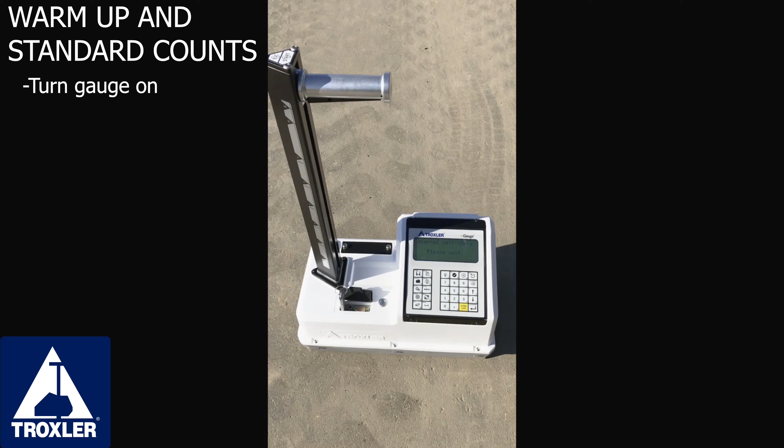The timer is set to 300 seconds. You do have the option to escape the warm-up, but it is not recommended. Troxler does recommend letting the gauge warm up for a total of 10 minutes. Once the warm-up is complete, you will be at the Ready menu.

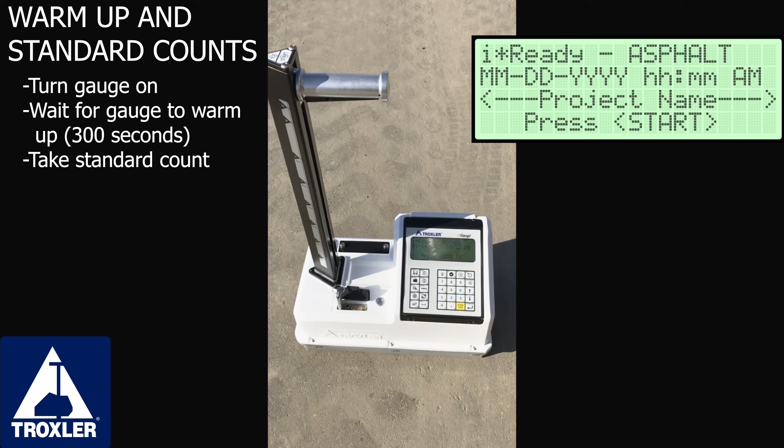It is always recommended to take a standard count at the beginning of each day that the gauge is used. This is done by pressing the standard button on the keypad. The previous standard count is shown along with the question, "Take new count?" Press yes, and the gauge will walk you through the standard count process.

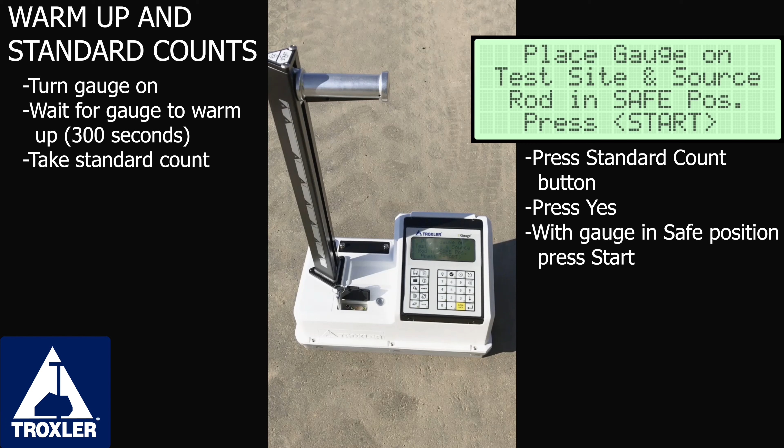Follow the on-screen prompts. The gauge needs to be placed on a solid and relatively dense material such as asphalt or compacted soil. This serves as the standard block. The standard count process is 2 steps, one with the rod in the safe position and one at the background position. Each step will be 2 minutes in length.

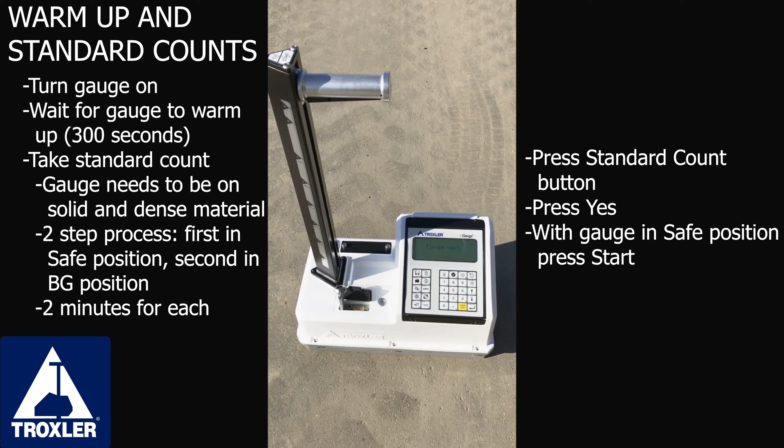After the first step is complete, the gauge will prompt you to move the rod into the background position and press start. It will then finish taking the second step of the standard count.

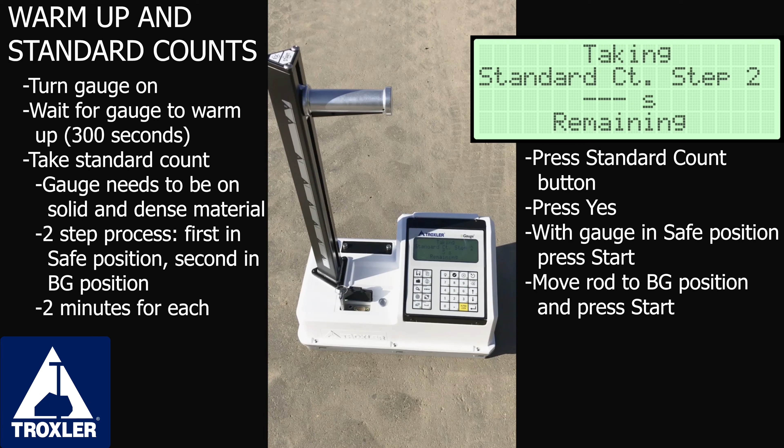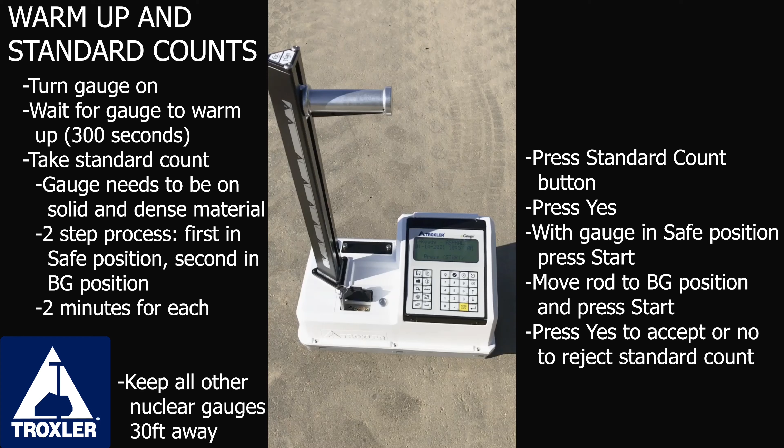Once that is complete, you will be shown the standard count values and asked if you want to use the new standard. A P or F will be displayed in the upper right corner of the screen to denote passing or failing. Press yes to accept a passing standard count or no to reject a failed one. If the standard count fails, it is recommended to take another one. Remember to keep all other nuclear gauges more than 30 feet away.

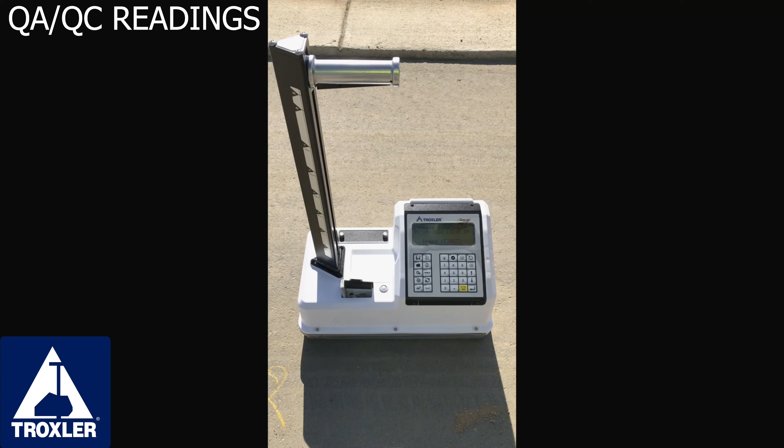To get the precision and accuracy needed for QA/QC readings, we recommend using the following procedure. Set the count time to 1 minute or longer and the background count time to at least 1 minute. Press the setup button and then 1 for count time or 2 for background count time. A confirmation screen will display your selection. Press escape to exit the setup menu and bring you back to the Ready screen.

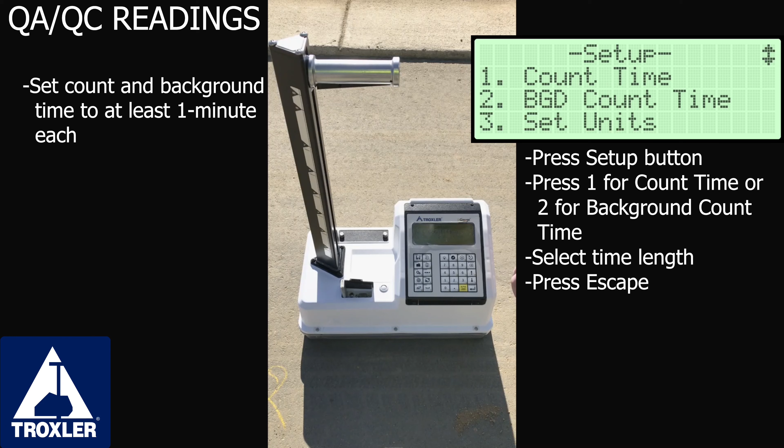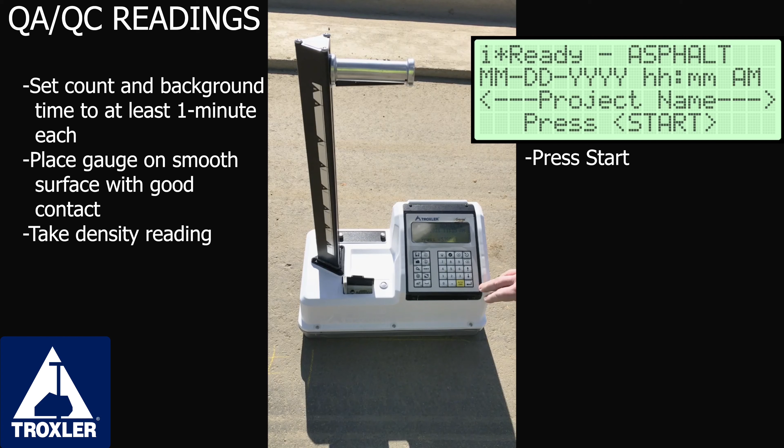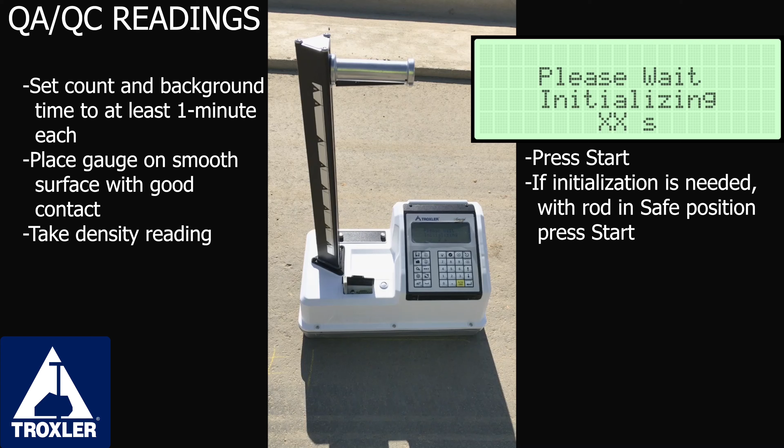At the test location, which should be a smooth surface where the gauge base makes good contact with the asphalt, press start to begin a reading. If an initialization is needed, the gauge will prompt you to put the rod in the safe position and to press start again to initialize. After the initialization, the gauge will prompt you to move the rod to the desired measurement depth. For asphalt measurements, lower the rod to the backscatter position.

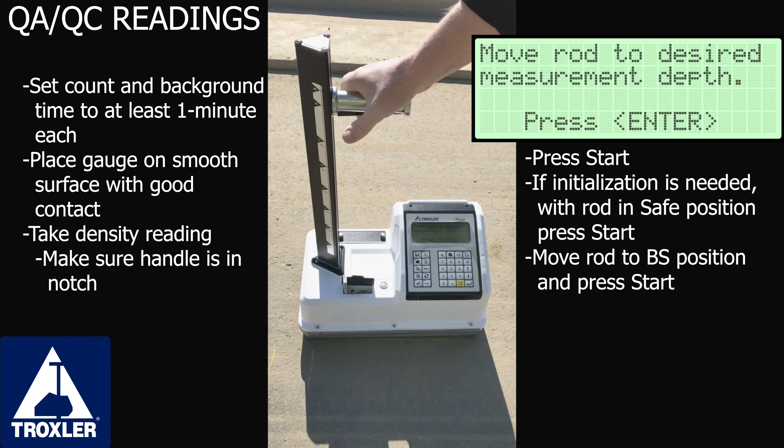When moving the rod, take extra care to ensure that the rod is at the backscatter notch. It can be easy to overshoot this notch. This will result in an inaccurate reading. To ensure the handle is in the notch, you can gently pull up on the handle, then push it back down to seat the handle at the bottom of the notch.

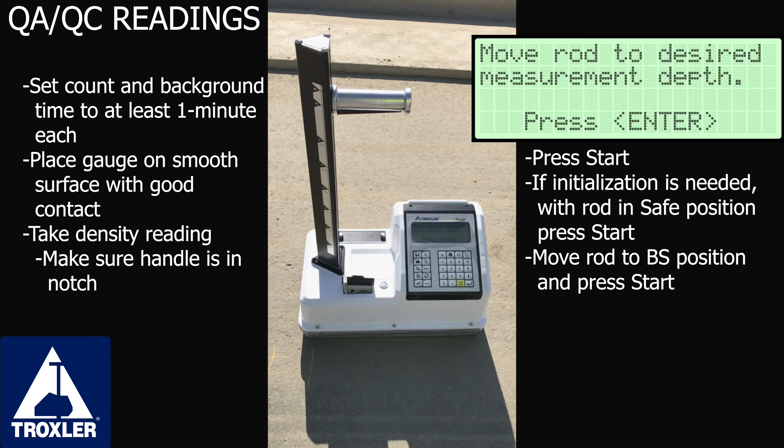Troxler's recommended method is to place the handle just above your target notch and then to press down without gripping the trigger until it stops. This will guarantee you do not overshoot the notch and that it seats in the proper position. Once the rod is in the backscatter notch, press start to begin taking the reading. All other nuclear density gauges should be in their safe position and kept over 30 feet away.

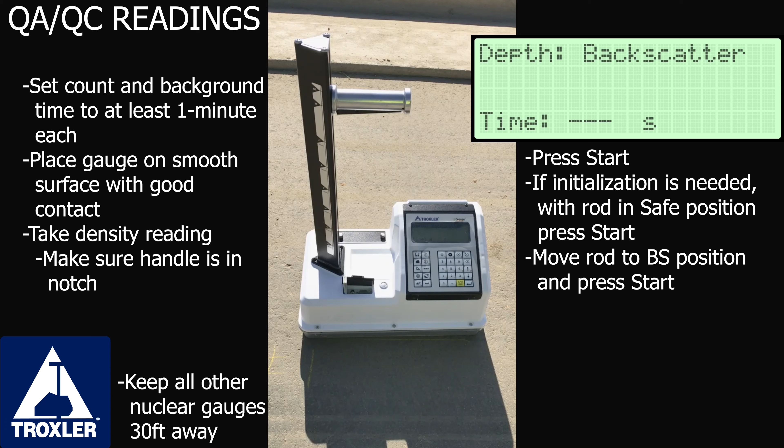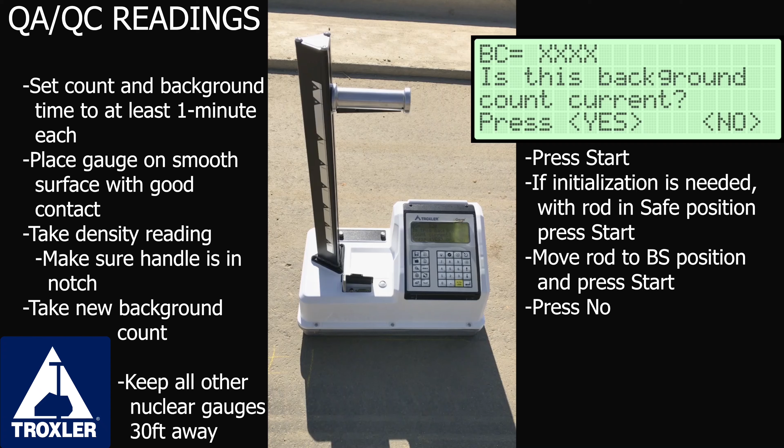After the reading has been taken, the gauge will ask you if the background count is current. Press no to initiate taking a new background count. Follow the on-screen prompts and move the rod into the background position. Press start to begin taking a background reading.

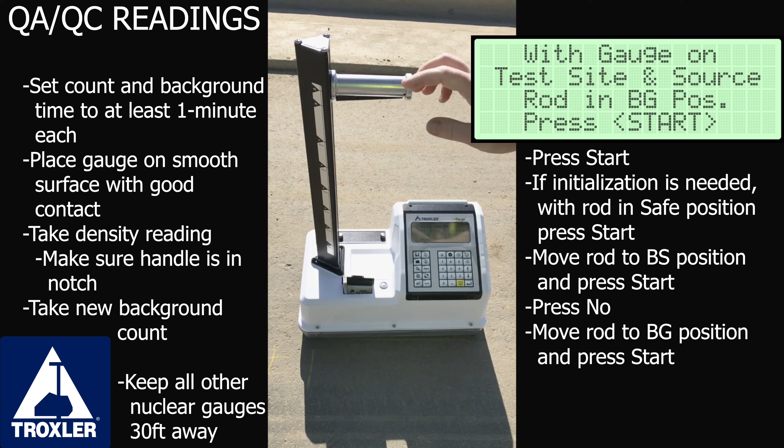At the end of the timer, the gauge will display the background count. Press Enter to proceed to the density results. Depending on what targets were enabled, the density results screen may vary. The top line displays percent compaction, the second line displays wet density, and the bottom line displays percent air voids if a voidless density target is entered. Additional screens with counts and GPS coordinates can be viewed by pressing the down arrow.

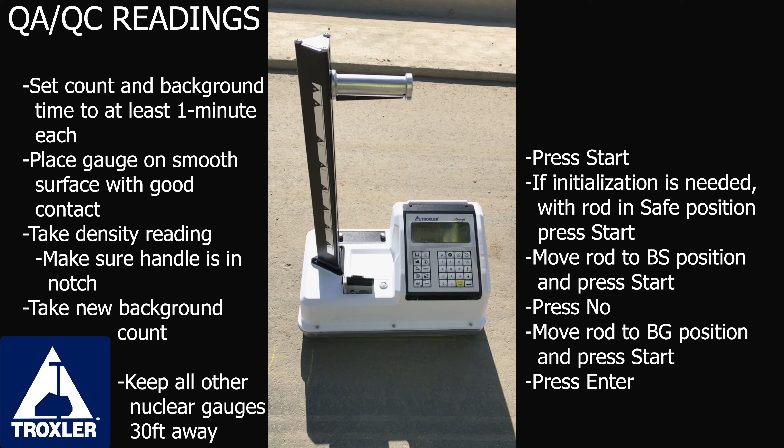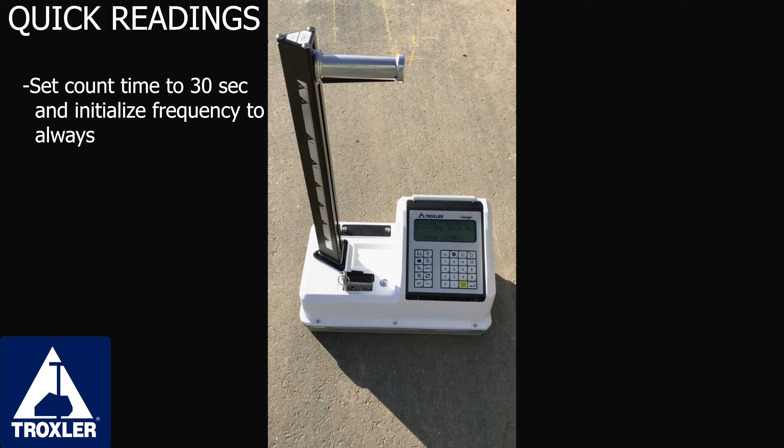Quick readings may be necessary when measuring hot asphalt and working between roller passes. To do this, the gauge can be set to take 30-second readings. When taking readings on hot asphalt, it is recommended to have the gauge initialized before every reading, as the hot asphalt mat can cause temperature fluctuations in the detector. Initializing the gauge before each reading ensures optimal performance for each reading.

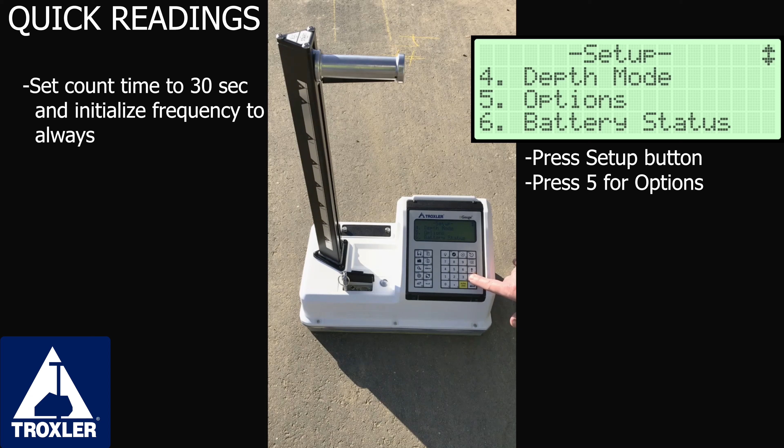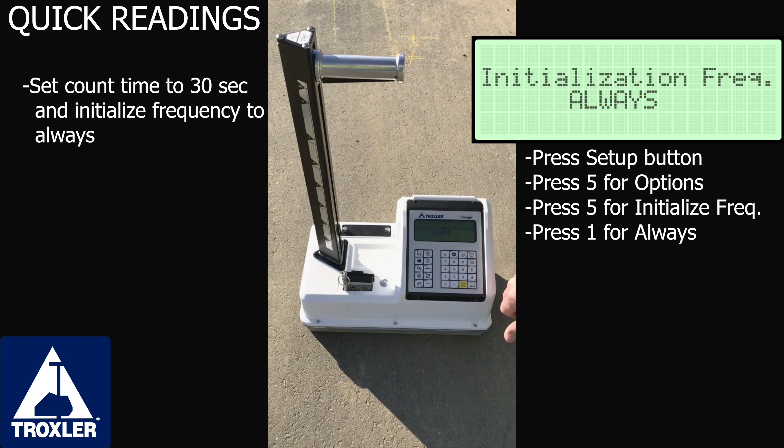To set the initialize frequency to always, press Setup, press 5 for options, then press 5 for initialize frequency. Choose 1 for always. Your selection will then be confirmed. Now let's set the count time to 30 seconds. From the Options menu, press Escape to get to the Setup menu, press 1 for count time, then press 5 for 30-second readings. Your selection will be confirmed. Press Escape to get back to the Ready screen.

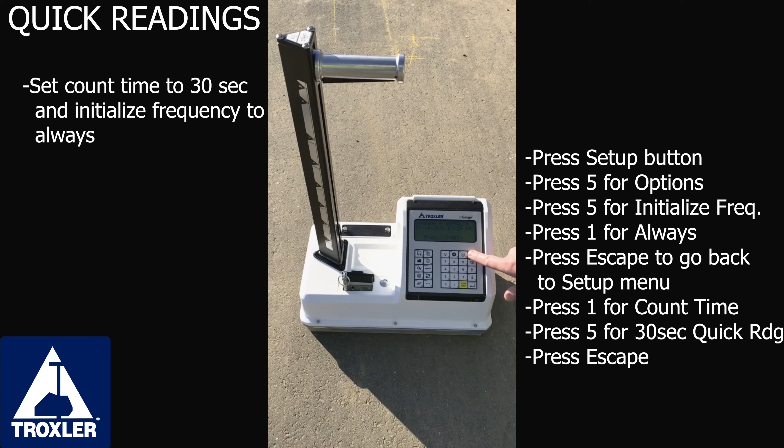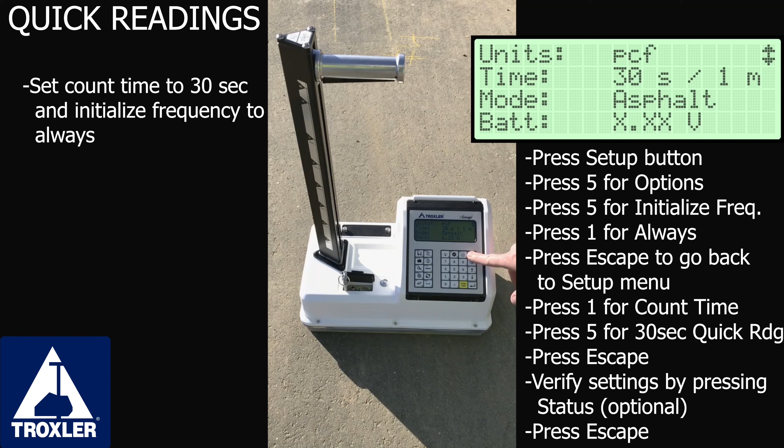You can verify your settings by pressing Status on the keypad. Press Escape to get back to the Ready screen. If this is your first reading of the day, you will want to take a reading on the same mix you will be measuring to get a current background count. From the Ready screen, press Start and follow the on-screen prompts to begin an initialization. After the initialization, follow the on-screen prompts to take a reading by moving the rod to the backscatter position and press Start. Take a 30-second reading.

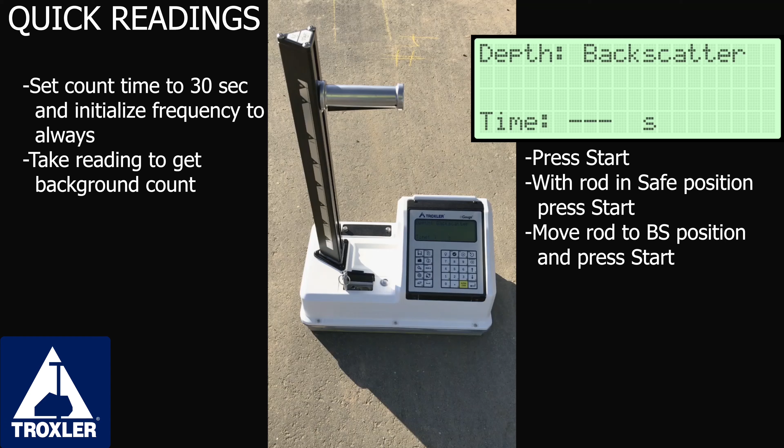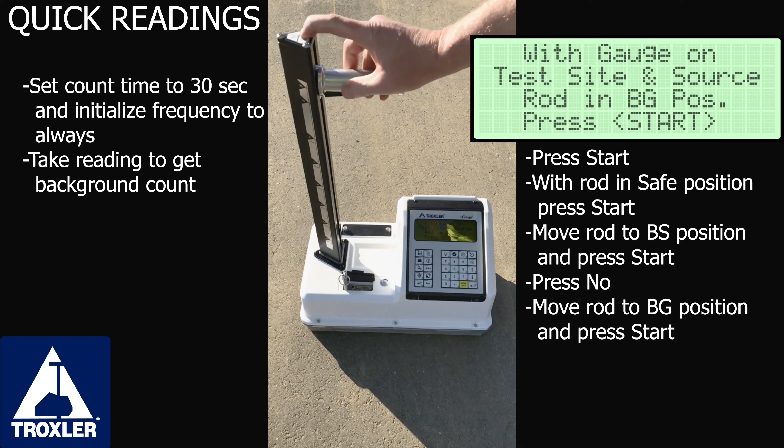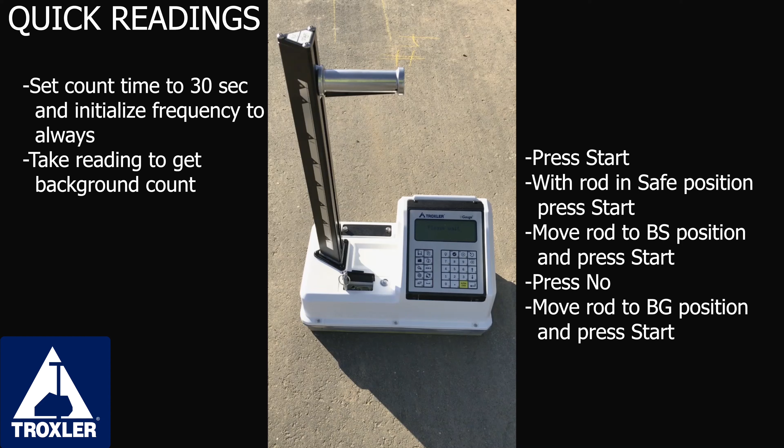When the gauge asks if the background count is current, press No. The gauge will prompt you to move the rod to the background position and press Start to begin taking a background count. After this background count is taken, you will not need to take another background count for any additional quick readings that day unless the mix changes. Press Enter when the background count is displayed, and press Enter again when the density measurement is shown to get back to the Ready screen.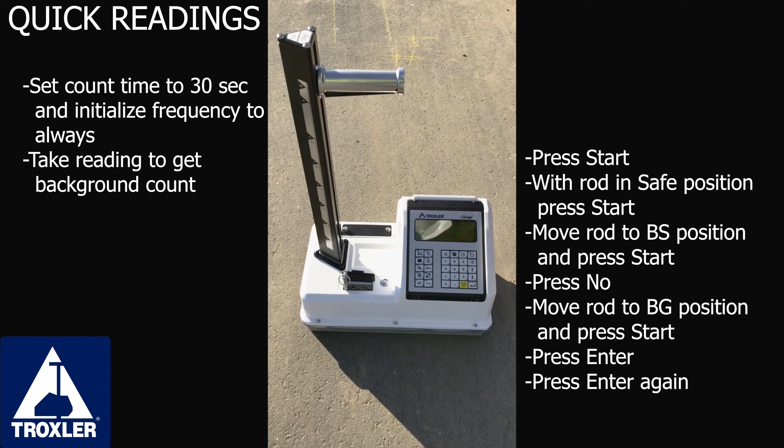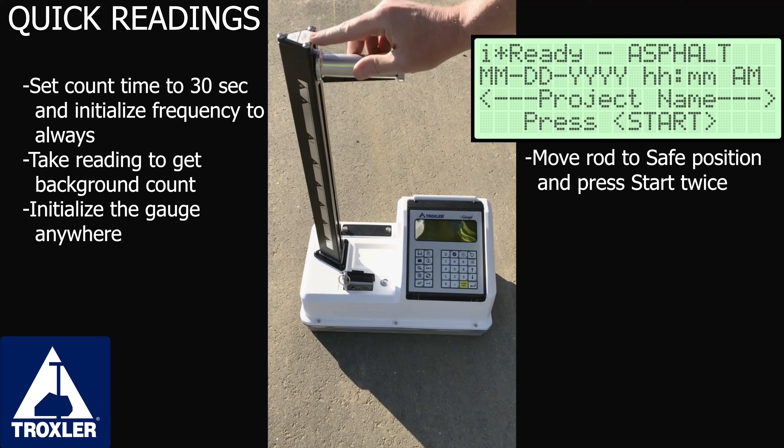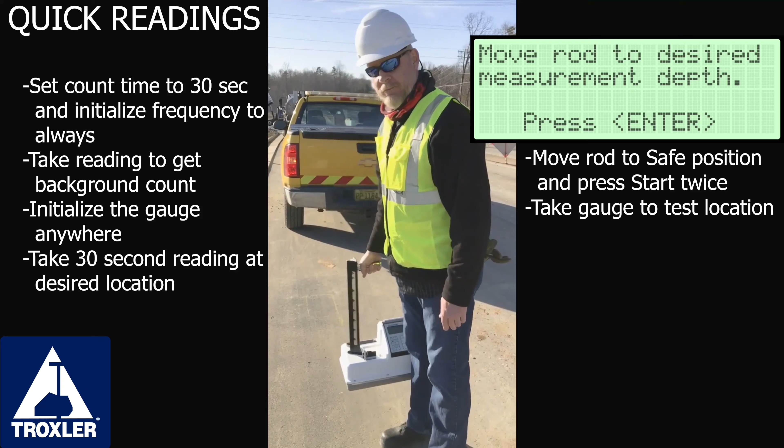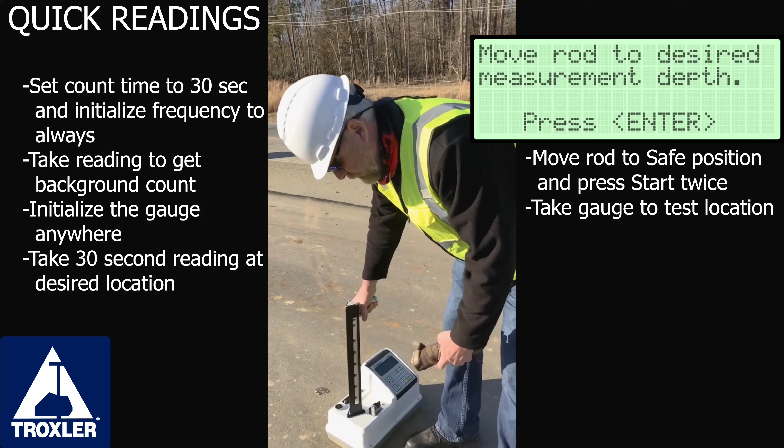Once back at the Ready screen, you will want to initialize the gauge. It does not matter where you initialize the gauge, so you can initialize while walking to the test location or off the asphalt somewhere else. Once the measurement depth screen is showing, the gauge can be taken to the test location. Place the gauge where the measurement is going to be taken. Make sure it has good contact with the mat. Lower the rod to the backscatter position and press Enter to start taking the 30-second reading.

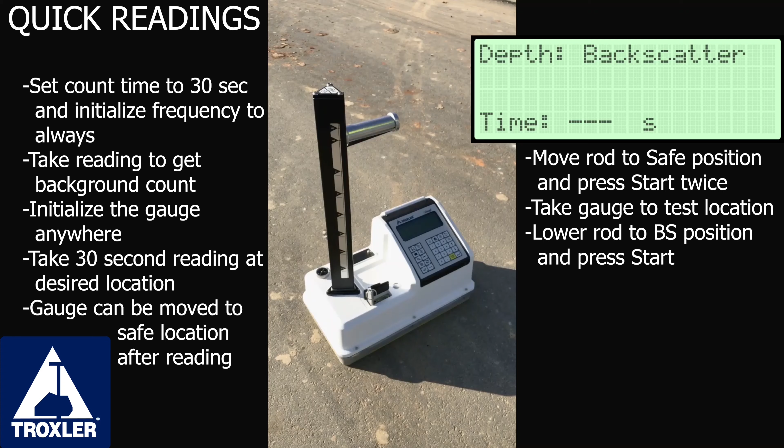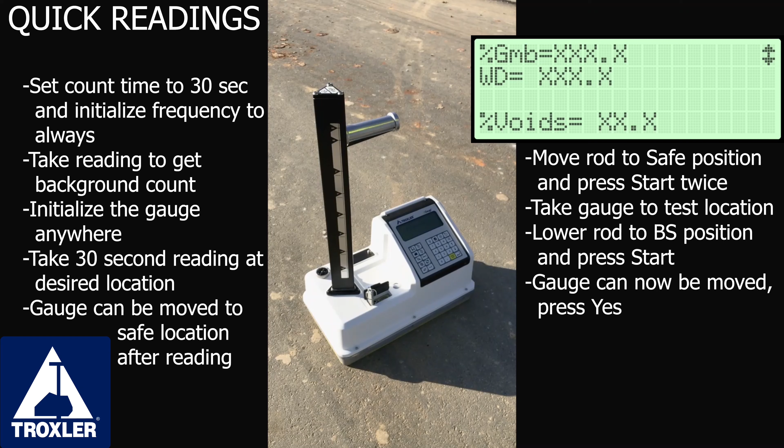After the 30-second reading is complete, the gauge no longer needs to be kept at the measurement location. When asked if the gauge can be moved, press Yes, and your density results will be shown. This process of initializing the gauge elsewhere and then placing it at the test site to take the 30-second reading can be repeated. This will allow you to reduce the amount of time spent on the hot asphalt mat and reduce the risk of impeding the rollers.